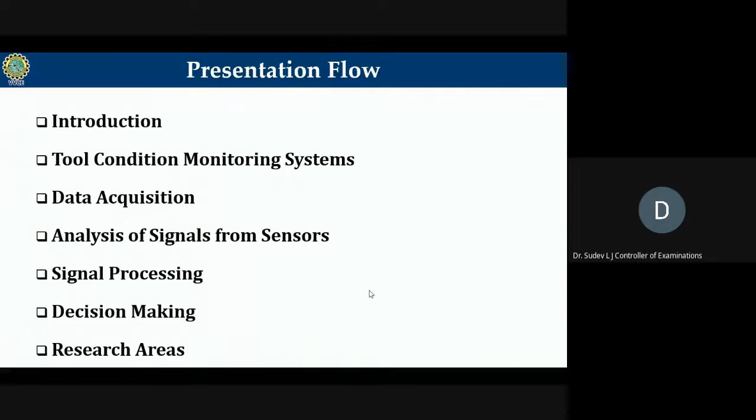Now coming to the introduction, we all know what the present-day manufacturing is.

Manufacturing sector has seen a lot of changes. There is a sea change from the olden days manufacturing to the present day manufacturing. If we take every item we use in our daily life, the way it was manufactured earlier was completely different from how it is manufactured now.

If you take a toothbrush, a simple device we normally use early in the morning, which was handmade, now this toothbrush is completely automated. The process of manufacturing a toothbrush is completely automated. We do not see any intervention of a human being in manufacturing those items now.

Any product was initially man-made. Now we have a situation where these products are man and machine made. In fact, we have stepped into an era where it is completely machine made. Though there's a transformation from man and machine made to machine made at this juncture, probably in the days to come, every product will be made by machines only, without the intervention of any human being. With the rolling out of Industry Revolution 4.0, 5.0 and so on, in the days to come, any product will be manufactured by machine made.

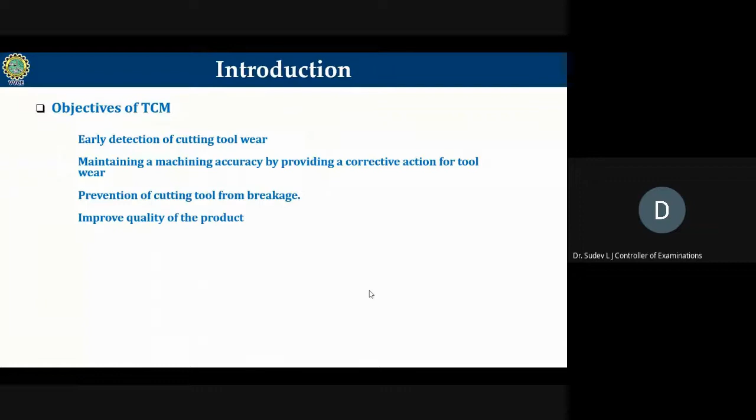To avoid the cutting tool from breaking at any point of time, tool condition monitoring can be adopted. By doing all this, we are able to improve the quality of the product. Productivity will increase, machine downtime will be reduced to a greater extent, and the cost of the product will go down. So these are the objectives of tool condition monitoring.

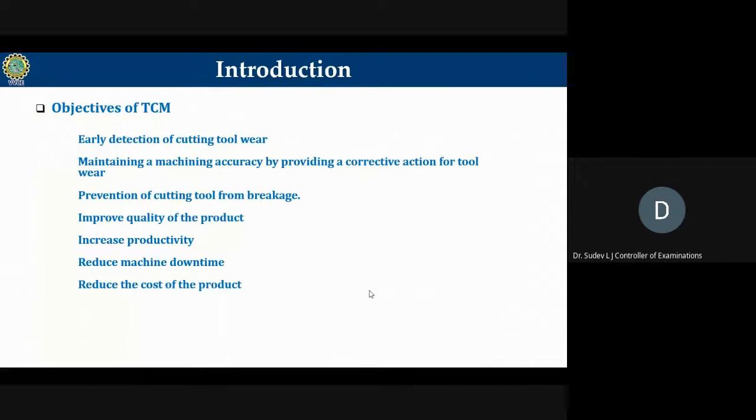Now, how is it done? What are the different methods available for tool condition monitoring? There are two important methods: one is conventional, which we cannot use, and the other is the advanced method, which we are supposed to use. Let me brief you about those two types of tool condition monitoring.

The first one is called the direct method of tool condition monitoring, a conventional method of monitoring the health or status of the tool. In this method, during the machining process, the machine is stopped, the cutting tool is removed from the tool post, observed under a microscope, and the tool wear is measured. Then you determine whether the tool wear is within limits or has crossed the limits, and make a decision whether you are using a sharp tool or a worn out tool.

In this direct method, you are measuring the tool wear by conventional process, measuring the volumetric loss. When I say volumetric loss, it is the wearing out of the material from the sharp edge of the tool. That is what we call the direct method.

This is completely an offline method. What are the disadvantages? If you want to follow this direct method, I will have to stop the machine, remove the cutting tool from the tool post, observe it under a tool maker's microscope, measure the tool wear, then decide whether the tool is worn out or sharp. By this time, the production rate would come down drastically because of machine downtime. This is not a suggested method of tool condition monitoring; it is very conventional.

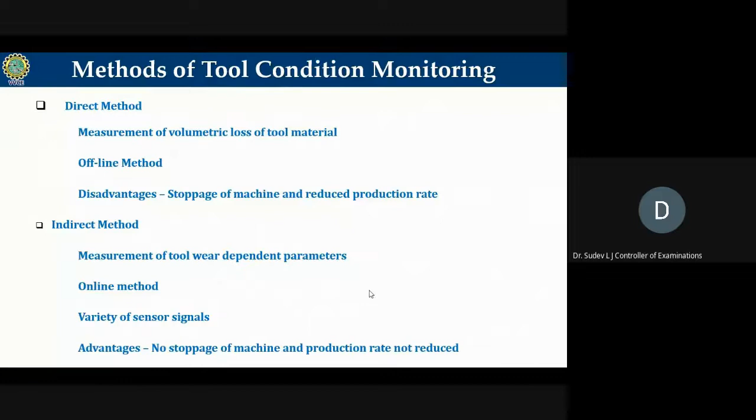If you follow this online method, you don't have to stop the machine, and the production rate is not reduced. So all present day condition monitoring systems use this indirect, online method. There are so many sensor signals available which can be monitored to determine the status of the cutting tool. So any research work or development of tool condition monitoring systems is based on the indirect or online method, or I would rather call it an automatic method.

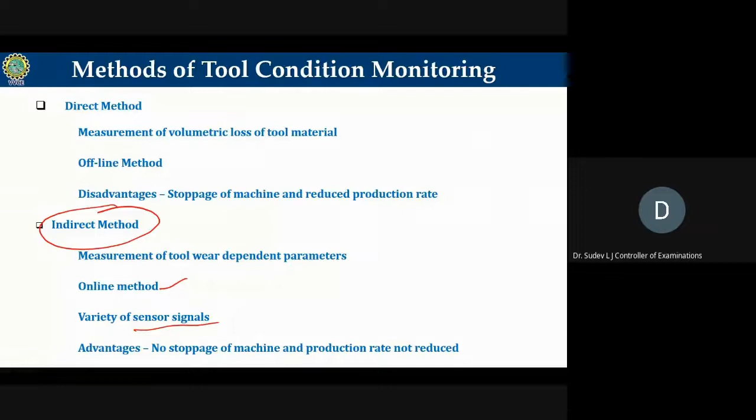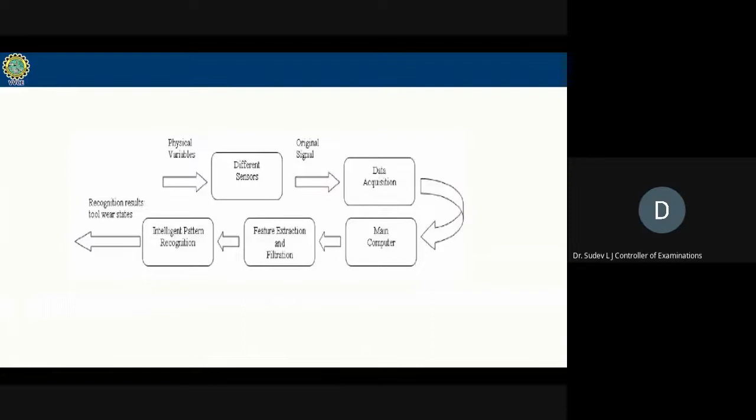So what is the configuration of a tool condition monitoring system? How does it actually work? This is a block diagram which very briefly indicates how a tool condition monitoring system would work. All the signals obtained from different sensors are acquired by a data acquisition system. Those signals, acoustic emission, cutting force, torque, temperature, and so on, which are dependent on tool wear, are acquired by the data acquisition system and stored in the main computer.

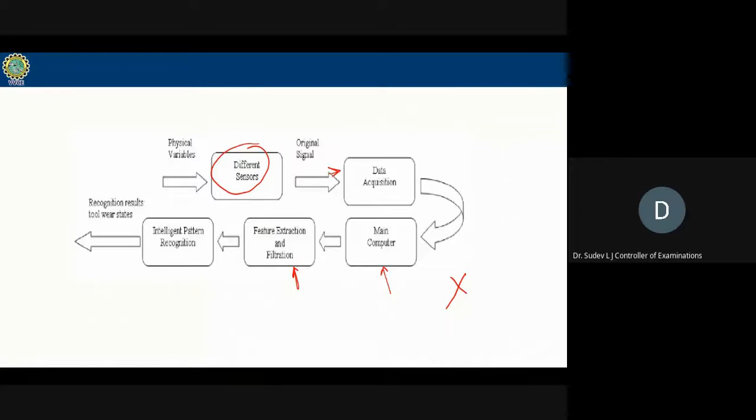From these signals, certain features are extracted, or these signals are processed to our requirements. The processed signal is given as input to a device or system which makes a decision about the condition of the cutting tool. For example, if the cutting force is greater than some value X, the system determines that the tool is worn out. If the tool tip temperature is more than, say, 100 degrees centigrade, just an example, the system says the tool is worn out.

So this decision on the condition of the cutting tool is based on the values of these signals. We have intelligent pattern recognition systems and intelligent decision-making systems, which give us the information about the status of the tool, whether it's worn out or a sharp tool. In simple, this is how a tool condition monitoring system would work.

In fact, this is how an online tool condition monitoring system would work. During this process, nowhere do you have to stop the machining process. As the machining is going on, parallelly, you are monitoring certain signals, acquiring certain signals on a real-time basis. Those signals are processed, and based on the intensity of those signals, a decision is made whether the tool has worn out or it is still in good condition. If the decision is made that the tool is worn out, only then you can stop the machining process and replace the tool.

If we are using advanced machines now, like CNC machines and so on, which have automatic tool changers, that intelligent system can give a control signal to the automatic tool changer to change the tool automatically, without waiting for a human being to come and intervene. So this is basically how a tool condition monitoring system would work.

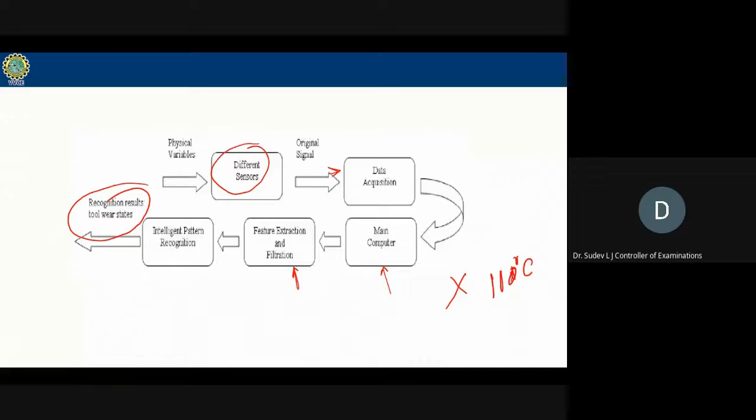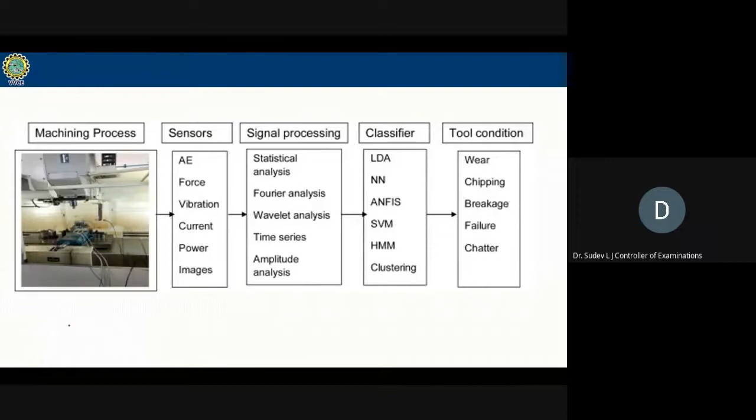Again, this would explain the same process, but this time it would elaborate on what type of sensors are used and so on. If you look at the left-hand side here, this is the machining process. Machining is going on, and there are so many sensors mounted. From those sensors, the following signals can be acquired: acoustic emission, force, vibration, current, power.

You can also take the image of the cutting tool using a machine vision system. You can install a camera on a real-time basis, keep taking the images, match those images with a worn-out tool, then take a decision whether it's worn out or it is still in good condition.

You can also add temperature, tool tip temperature. If you are doing it for a drilling process, you can add torque. So there are so many such sensors that can be used, or so many such signals that can be acquired. Now these signals are processed.

Why are they processed? I will let you know later. This processed signal is given to a classifier, or given to a decision-making system. That decision-making system would give us the condition of the cutting tool. It will let us know whether it's a worn-out tool, whether there is any chipping in the tool, any breakage in the tool. It will let us know whether there's a failure in the tool, or if there's any chatter or vibration in the cutting tool. That condition can be determined. So in general, this is the block diagram explaining how a tool condition monitoring system would work.

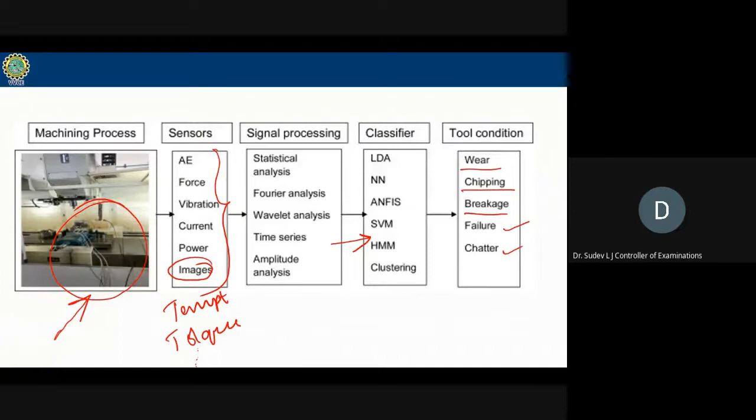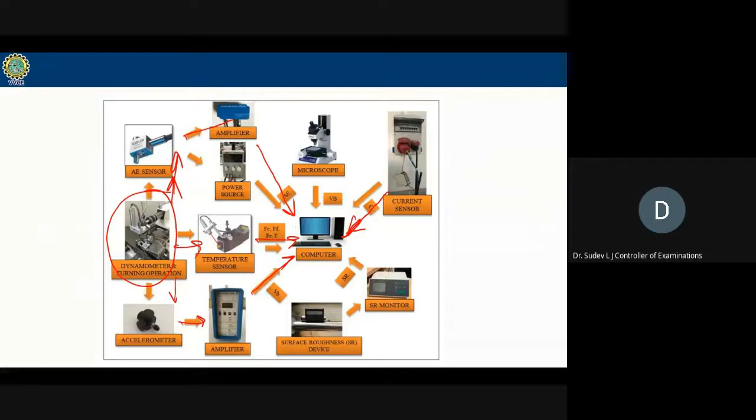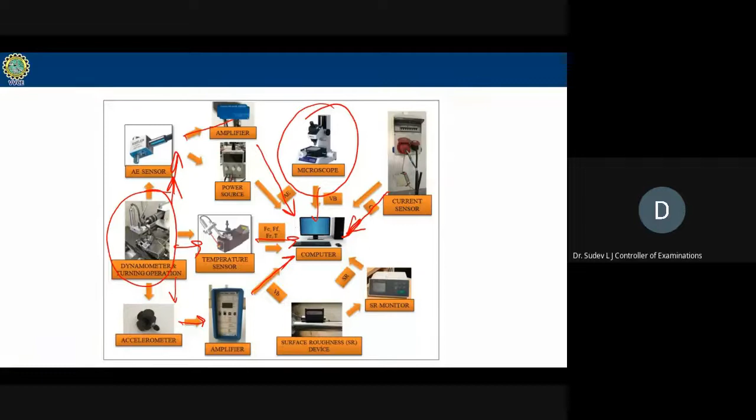Just to cross-check or to correlate that with the tool wear, you can also measure the tool wear using a toolmaker's microscope, and that can also be stored in the computer, just to correlate those two. So data can be simultaneously acquired from different sensors, from different sources, and those data are stored in a computer. This is called data acquisition.

This is one more sketch. You have a microphone mounted to pick up the noise, pick up the sound. You have a force sensor that is amplified, and through an AD card, analog to digital card, it is stored in a computer. You have a TV camera here to click the images of the cutting tool at different stages through a vision system. You have an AE, acoustic emission vibration sensor.

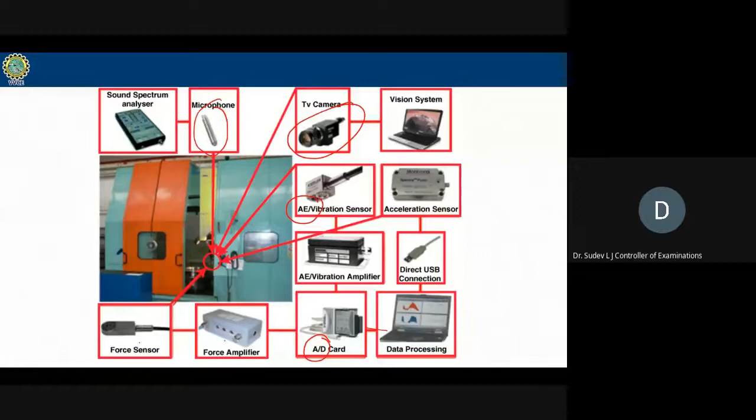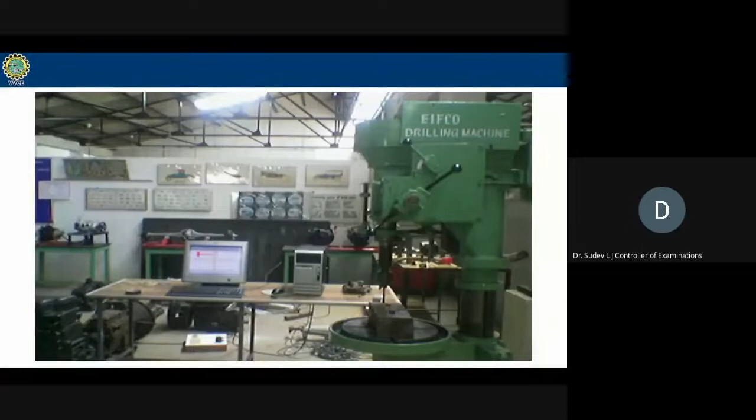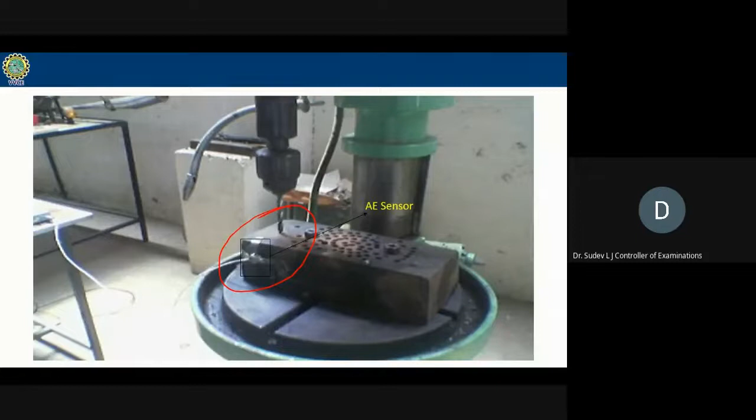This is the acoustic emission sensor mounted on the workpiece very close to the machining area. That acoustic emission signal is actually captured in the personal computer.

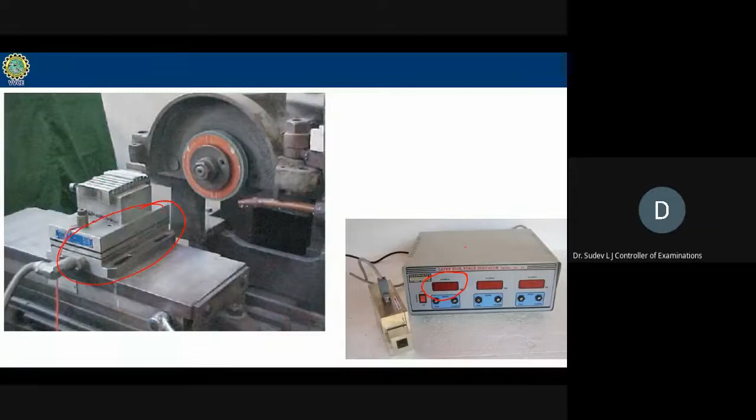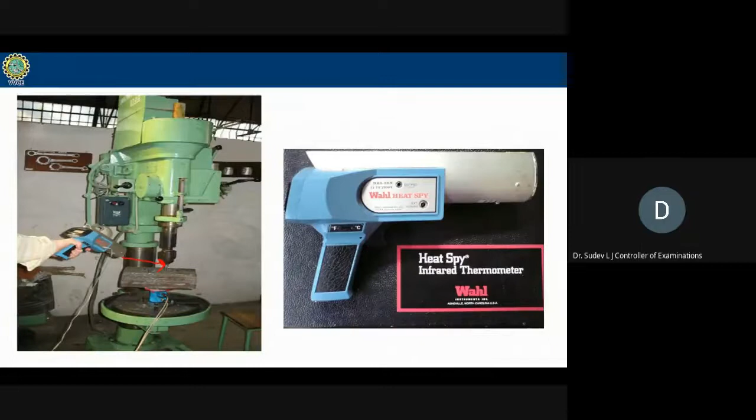So these are some of the sensors available for measurement of the tool dependent parameters. When you measure these parameters, what guarantee is there that these signals actually correlate to tool wear? There is no guarantee. They might represent the actual value of tool wear, they might not. So before we proceed, these raw signals, acquired from different sensors, are subjected to simple analysis.

Simple functional relationships are plotted. This is one example here. You have wear being captured here. There is a graph which shows the variation of the cutting tool wear, and along with that you can also see various other signals: thrust, tool tip temperature, and torque. Now, what can we observe from this graph?

If you closely observe, as the tool wear is changing, accordingly, thrust is also changing. But the deviation of torque and the deviation of tool tip temperature is not that significant. Now, from this functional relationship, I come to a conclusion that thrust is closely related to the wear data compared to torque and temperature. This gives me an indication of which among the measured signals is giving me the real picture of the tool wear.

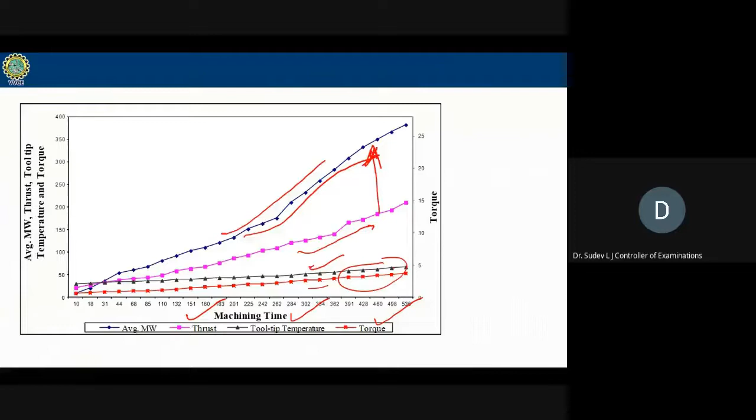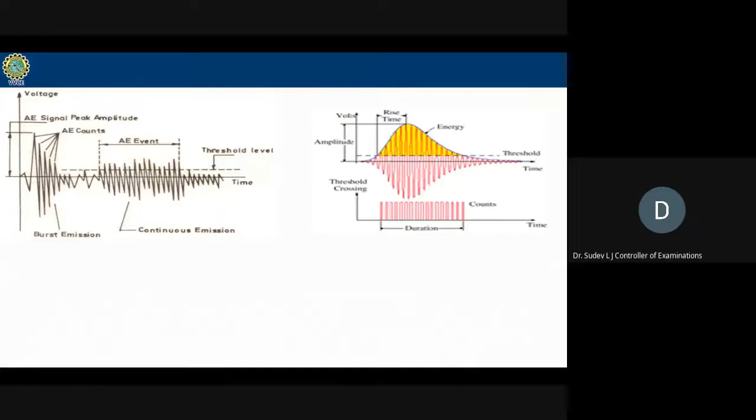Likewise, I can capture acoustic emission. This is the waveform of an acoustic emission. Acoustic emission has different parameters. You can measure so many parameters from this one single waveform, like RMS, energy, signal strength, count, frequency, and so on. You can derive so many parameters.

Let me show an example of how these parameters would vary with tool wear. This is a graph which shows the variation of one AE parameter, AE RMS, with the machining time. If you observe, as the machining time increases, the AE RMS is also changing. Initially, AE RMS shoots up, then it remains constant, then again it increases rapidly.

Hope you all know the characteristics of tool wear. Any tool wear curve has 3 stages. The first stage, where there is a rapid increase in tool wear, is called the set-in period. The second stage, where tool wear almost remains constant, is called the steady state stage. The third stage, again, there is a rapid increase in tool wear. So the first is the set-in period, then the steady state condition, then the rapid tool wear stage.

As the tool is used for a longer time, the tool wear increases gradually. Initially, it takes some time for the tool to set in. So when a new or fresh tool is used, initially there will be higher tool wear, then it settles down, then it increases rapidly.

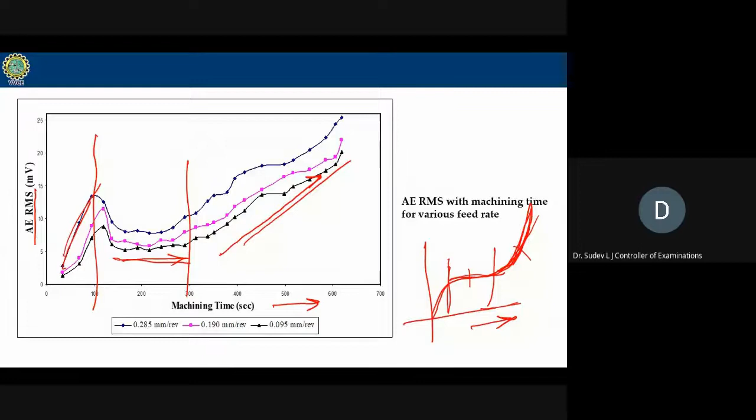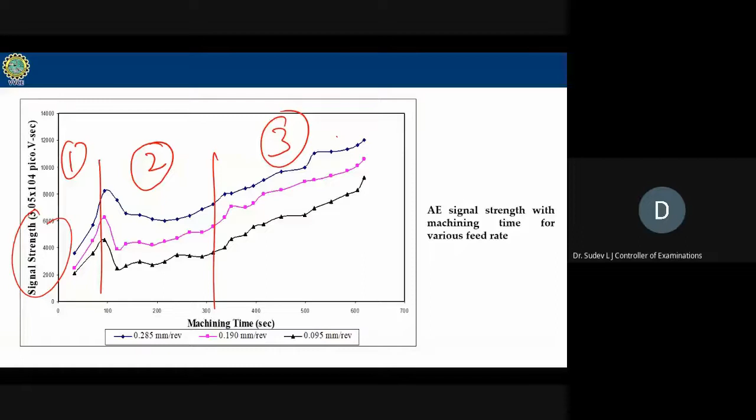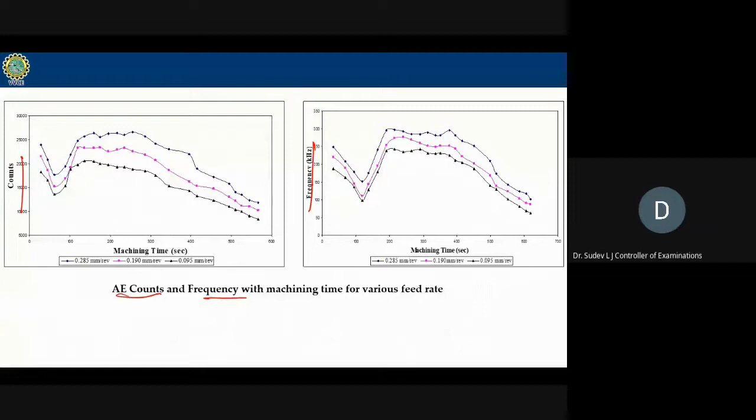There are 2 more signals here. One is called AE count. The other one is called frequency, AE frequency. These 2 signals are actually the inverse of what we had in the previous 3 cases. Where there is an increase in signal, AE count decreases. Then it remains constant. In the previous case, when there is rapid tool wear, the signal increased, but here the signal decreased.

Though it is reverse of what happened in the previous 3 cases, there are still 3 stages here. Stage 1, set-in period. Stage 2, steady state period. Stage 3, rapid wear period.

So from these simple functional relationships, we can understand, or we can correlate the behavior of the measured signals with the tool wear. We are guaranteed that these signals can be confidently used to indicate the status of the cutting tool. They can be used to predict the cutting tool wear.

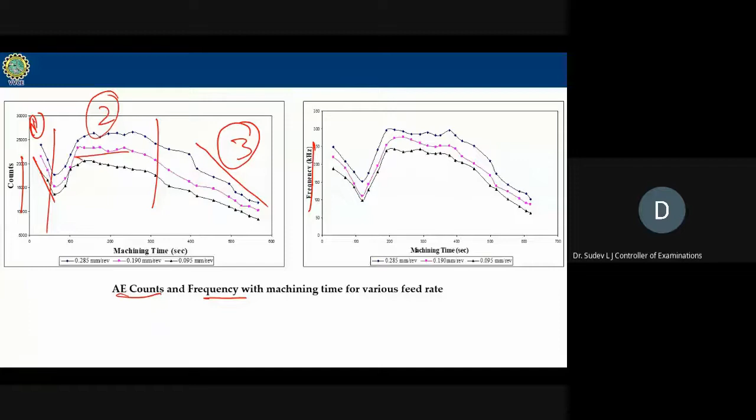Now, after having done this simple analysis, after having acquired the signal and done the simple analysis, the next stage is signal processing. Now the question is, why is signal processing required? What do we mean by signal processing and why is it required? See, any raw signal obtained from a sensor will also carry along with it certain noise. Noise are unwanted signals. These signals sometimes would be very feeble. They require some amplification. If they carry noise, they will have to be denoised and filtered.

Also, these signals have certain features that strongly correlate to the tool wear, so we will have to extract that feature from the raw signal. This filtering and feature extraction, I would call signal processing. Denoising it, modulating it, or amplifying it, extracting the features, all this put together, we call signal processing. The signal is processed to extract the right feature, to remove the noise, to amplify it to the required level, and so on.

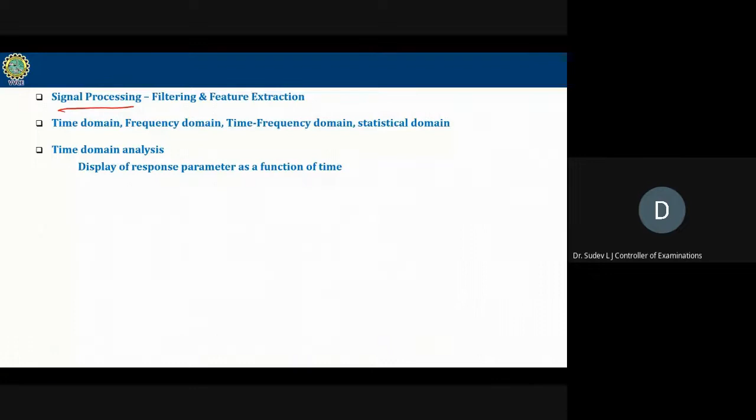Now what type of signal processing can be done? Of course, it might not be a cup of tea for a mechanical engineer. Probably an electronics and communication engineer would be more familiar with these types of signal processing analysis. Signal processing can be done in time domain, frequency domain, time-frequency domain, or statistical domain. When we're doing time domain analysis, our focus is on analyzing the signal as a function of time. These analysis methods apply time series models to the raw waveform data.

There are so many models that are available, and those models are applied. All these are time series models applied in the time domain analysis. Usually, force signal is subjected to time domain analysis because force tends to vary with time. So force signals are subject to time domain analysis.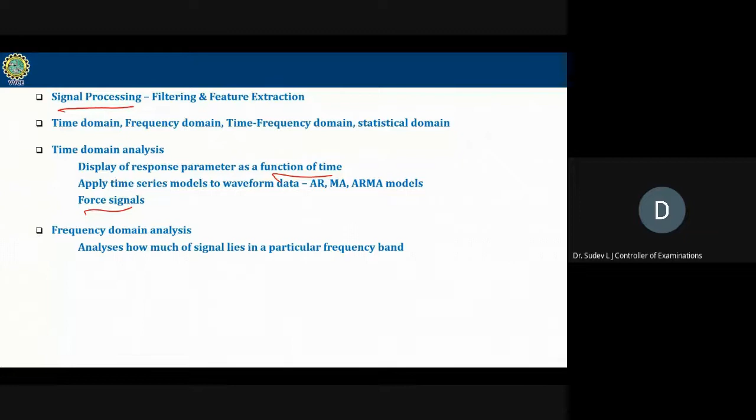Frequency domain analysis is something different from time domain analysis. This method analyzes how much of the signal lies in a particular frequency band over a range of frequency. We have fast Fourier transforms to do this.

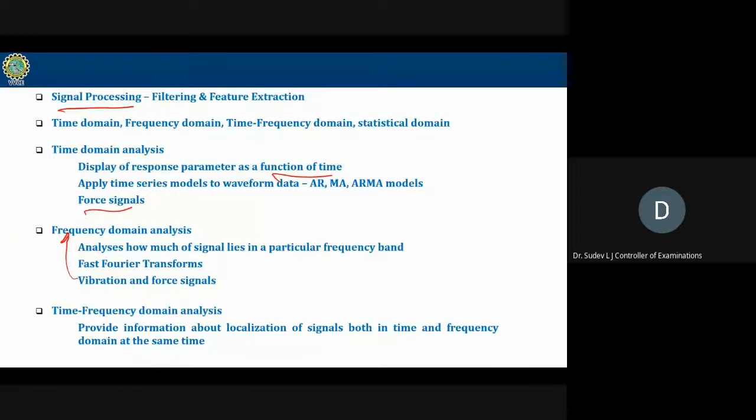Vibration and force signals are the normal signals which are usually subjected to frequency domain analysis. In time-frequency domain analysis, these methods provide information about localization of signals both in time and frequency domain at the same time. So these are some of the feature extraction and filtering techniques done on the raw signal so that the diagnostic method would be more efficient and effective in predicting the tool wear.

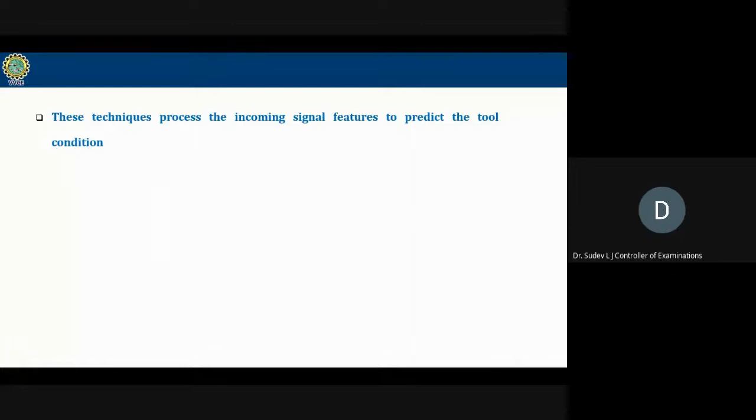After having processed the signal, next comes decision making. How are we making the decision? It is based on those processed signals. These processed signals are the incoming signal features. Based on that incoming signal features, we predict the tool condition. When I say predicting the tool condition, I am referring to estimating tool wear and classifying tool wear.

What do you mean by estimating tool wear? This tool condition monitoring system, over a period of time, can estimate the tool wear. It can say the tool wear is 100 microns, 150 microns, 200 microns. It increased from 200 microns to 250 microns. It can keep estimating tool wear.

As an operator, if we observe those estimated wear values, and find that the tool wear value has crossed a limit, then I will conclude that the tool has worn out. It is time to change the tool.

Or when the tool wear value crosses some limit, the system itself takes a decision that the tool has worn out. That system itself will send out a control signal to the machine, either to stop the machining process or to change the tool automatically.

Sometimes it gives you an alarm saying that the tool has worn out. So we can estimate tool wear, and also we can classify tool wear. When I say estimate tool wear, it gives you the value. When I say classification of tool wear, it only says the tool is worn out or the tool is sharp.

For example, during the machining, if a green light is glowing, it indicates the tool is still in good stage. At some point of time, if there is a glowing of a red light, it indicates that the tool is worn out. I will not know the value, but it will only indicate that the tool is worn out. It only classifies the tool, whether it's sharp or worn out.

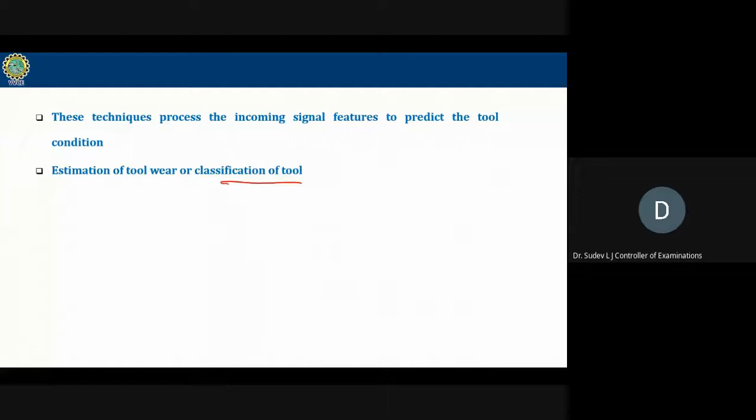This is what a decision-making system would do. There are so many methods available for decision making. We have statistical methods like regression analysis, pattern recognition, artificial neural network, expert system, fuzzy logic, and so on. Now, please remember, we are normally adopting a system which is based on AI and ML technology.

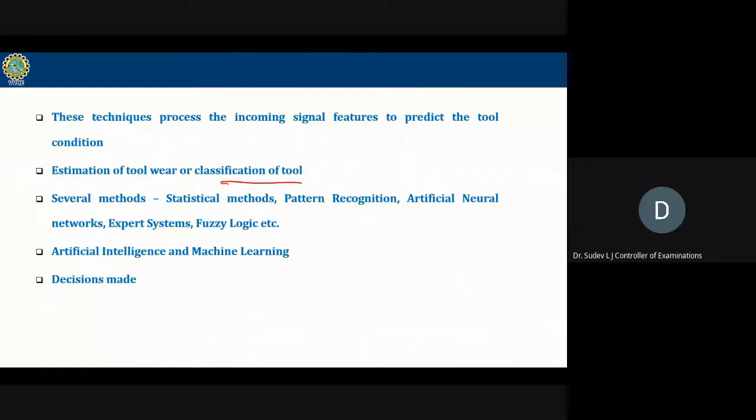Almost all the decision making systems used in tool condition monitoring are based on AI and ML, artificial intelligence and machine learning. These systems will make a decision. As I said earlier, if the value has crossed a limit, it will indicate the operator that the tool is worn out. The operator would change the tool, or the machine itself or the diagnostic system itself will decide to change the tool, sending a control signal asking the automatic tool changer to change the tool if it's a CNC machine. If it's a conventional machine, obviously you don't have automatic tool changing capacity, the operator has to do it. So in general, this is the overview of how a tool condition monitoring system would work.

But if you want to explore where all we can carry out research, if you are interested: number one, machining process. There are so many machining processes. The literature survey says there is a lot of work done on turning and milling processes. There are very limited works available on drilling and grinding processes. So you can select a particular type of machining process and carry out research. This is one of the parameters which can be thought of, selecting the right type of machining process.

Machines: should I carry out research on a conventional machine, a CNC machine, a high-speed machine? So research can be explored on different types of machines in condition monitoring. Types of cutting tool, a single point cutting tool or a multi-point cutting tool. Is it a 10 mm drill bit, 20 mm drill bit? What is the overhang? If I'm using a single point cutting tool, what is the overhanging length? So types of cutting tools can also be explored.

Cutting conditions, other conditions. What is the depth of cut? What is the machining cutting speed? What is the feed rate given? At different cutting conditions, we can just explore how a tool condition monitoring system would work.

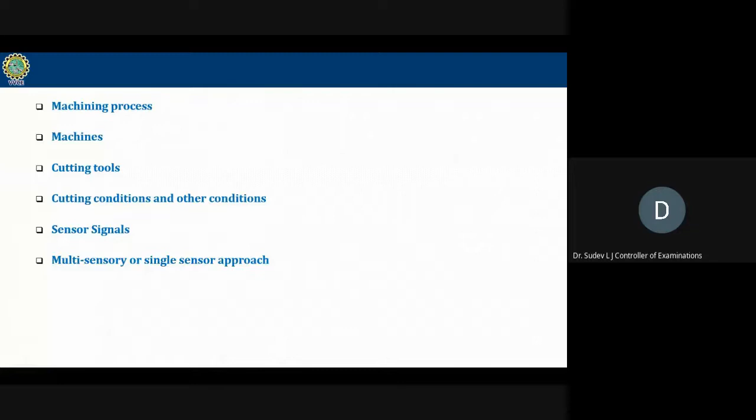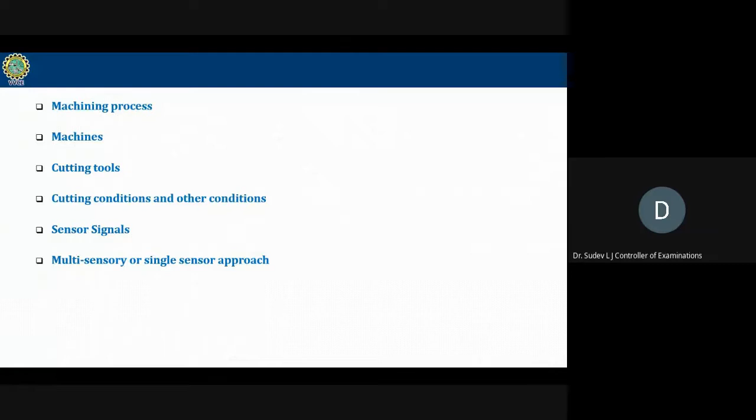Should I follow a multi-sensory or single sensor approach? Nowadays, all tool condition monitoring systems use multi-sensory approaches - you combine more than two signals and try to monitor the status of the cutting tool, not based on a single signal obtained from a single sensor. Multi-sensory approach is given a lot of importance, but there are systems which work on a single signal from a single sensor.

Data acquisition methods can be looked into - what method should be adopted to acquire the data, in what conditions, and how do we integrate those? Integration of data is also very important. When following a multisensory approach, data are acquired independently, obtained from different sources, and those data will have to be integrated and given as an input signal to the decision-making algorithm.

So data acquisition methods - at what conditions do you acquire those data, and how do we integrate those data - all this can be explored.

Signal processing - every stage of signal processing, like denoising, extracting features, effectiveness - if you use an artificial neural network, find out how effective it is.

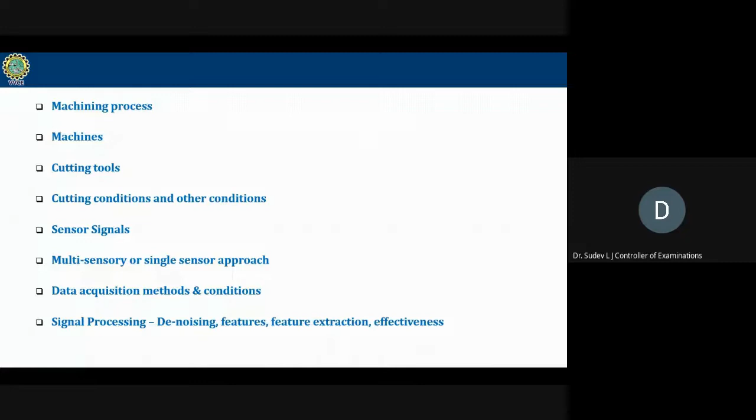So these are some of the areas which we can explore. The last one is decision-making techniques - what different techniques can be used, and what is the effectiveness of those techniques. Whenever you use a decision-making technique, by itself that technique would not tell you this tool is worn out - it should be trained first.

That is why I said machine learning comes into picture here - that system should learn the process, so we need to train it initially. When I want to train the system, how much amount of data should I have to train it? That training set will have an effect.

Any artificial neural network will have a lot of hidden layers. The network differs from one type of ANN to another. You can explore the different types of architectures available, and identify which one is best suited.

So these are some of the areas which can be explored if you want to carry out research on a tool condition monitoring system.

Now, if time permits, maybe I can take just a simple case study and show you how it works. Or probably we can close at this stage.

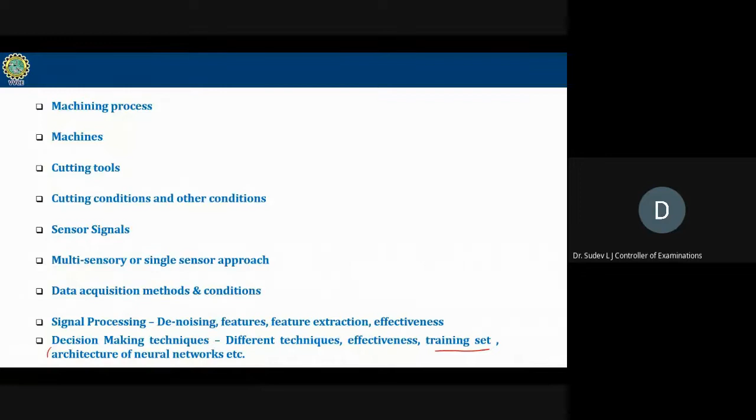Sir, can we close at this stage? I actually had a case study to show the participants, but that probably takes some more time. It's already 3:43. I think we will stop at this stage with an overview of how the tool condition monitoring system works. If there are any questions from the participants, I would be happy to take them.